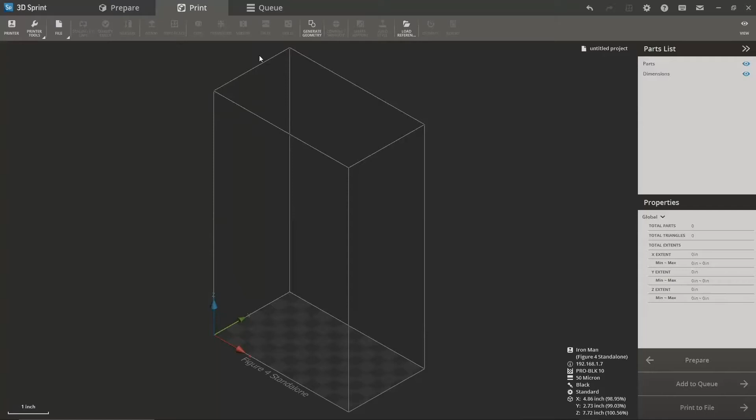All right, so today we're going to just jump into modification of support structures as well as nesting. Kind of give an example of what you can do with the Figure 4 as far as custom supports and things like that goes. The software does a really good job of generating the supports automatically. As you learn the software and you learn the machine, it becomes a little bit easier to kind of dictate where the support and everything should go, where you're pretty sure you're going to need it to have a successful build.

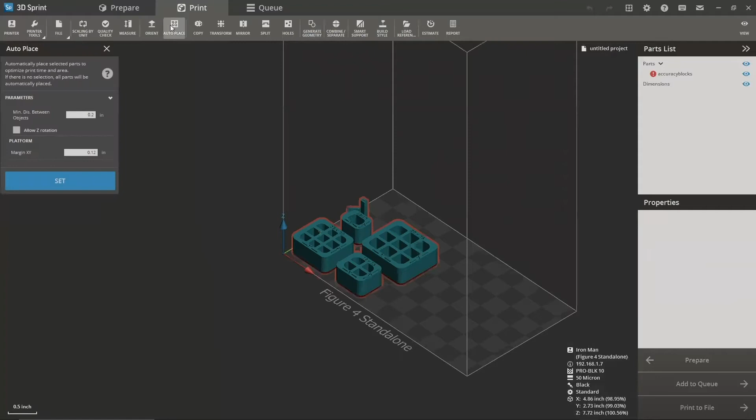So just to get a basic geometry, we can either generate the geometry, or in this case, we'll load our reference parts. Just kind of a preset part to check the calibration of the machine. Really nice and easy. It's outlined in red, so we know it's slightly off the build platform. So we will auto place, allow Z rotation, and that'll just center it in the build platform for us. So we can see here, there's a little bit of a buffer there between the parts and the build plate. That is for our support generation.

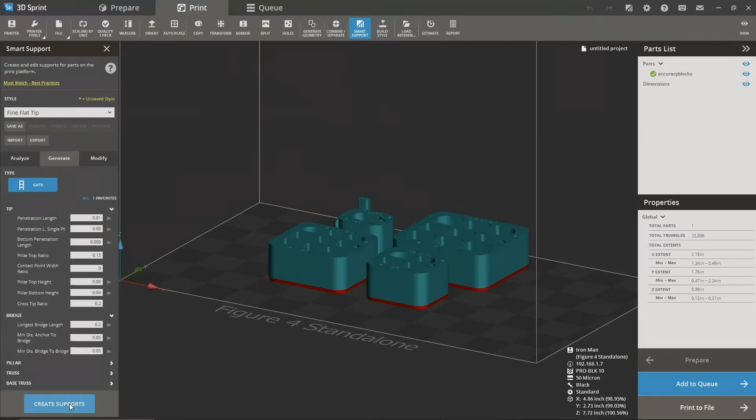There's a number of different presets you can choose from. You can offset the tip penetration length, the single point penetration, really just a wide variety of different parameters that you can offset based on your level of knowledge or comfort with custom support generation. I'm just going to roll with the generic support structures here. Generates that. And you see we have our base, we have pillars, we have our touch points, everything you would need pretty well automatically generated.

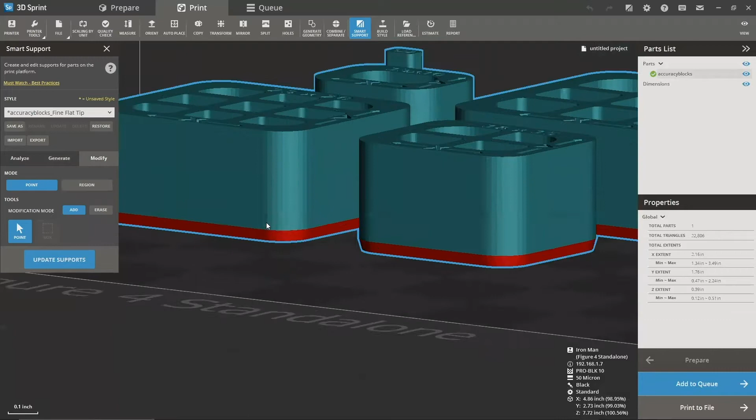From here, we can actually click over to the Modify tab, and basically anything outlined in red here on the parts, that's going to need support. It's a downward facing angle, so that will have support on it. All of our little touch points here, these were all automatically generated across all 4 parts. We could choose to add or delete points just by clicking. Makes it really easy to add.

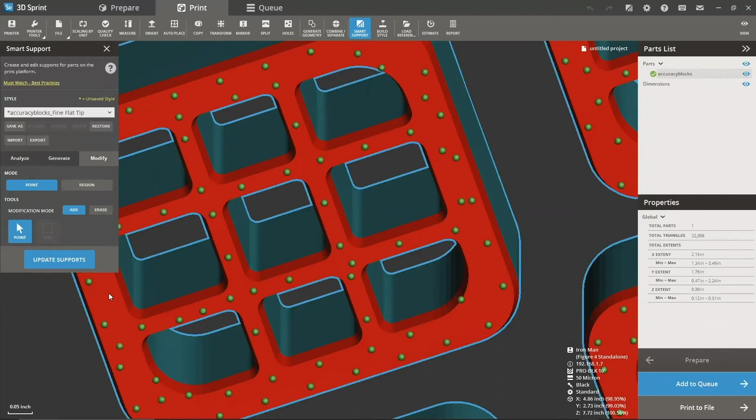If you have a larger part and you fear that one of the corners might peel up, you could add support there, or rounded pieces, you could add support along the edge, make it a true round. Really minimize any issues that you might have. Once you're done, click Update Support. I have done it so many times where I've put about a half hour or an hour's worth of work into something and not hit Update Supports and lost it all. So don't make my mistakes.

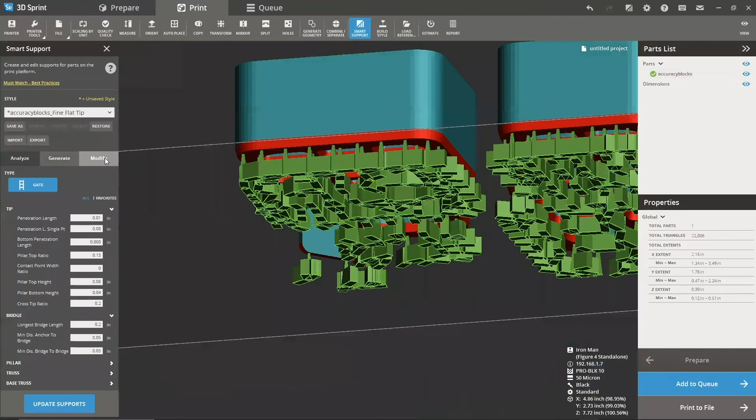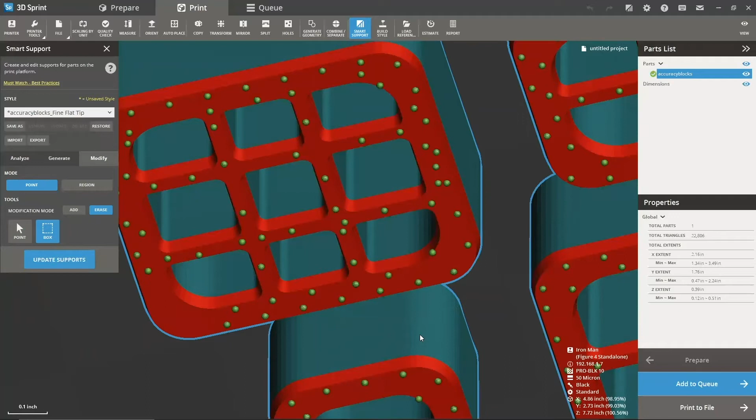Along with adding the supports, I mentioned you can delete supports or erase them. You can choose to go point by point, just kind of delete them out one by one. Or if you want to take a quicker method, there's an outline box that you can use. Just highlight the points that you want to get rid of, and just kind of get rid of everything there.

Again, update supports, and on that piece, it wouldn't have support. Probably wouldn't build, it would just kind of float off into the tray. So in that case, we can highlight it again. And there's our supports again.

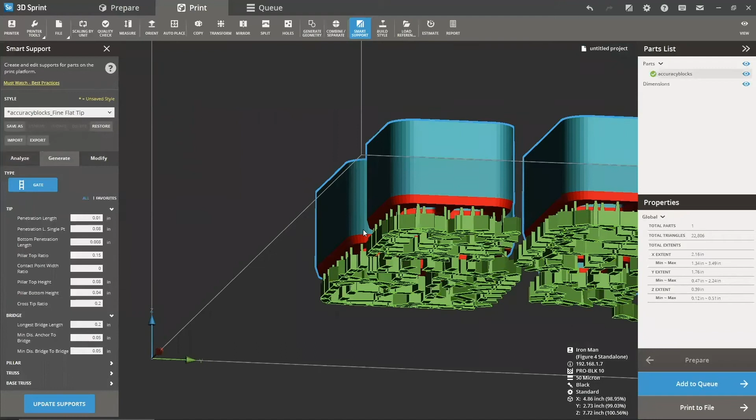So from here, we can take our build estimate based on the parameters we have set for the machine, 50 microns, standard build, about 14 minutes to build these accuracy blocks. You can see here the millimeter measurements on there, 28 by 25 for the big block, 23 by 20 for medium, so on.

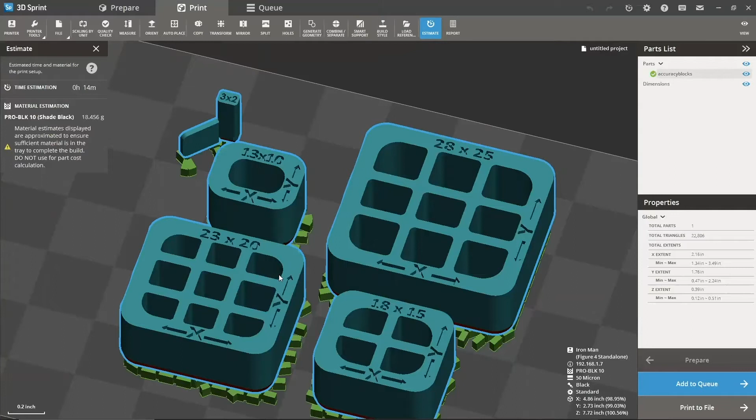So to delete the supports, you just highlight them, you'll see them outlined in blue instead of green. Press delete, and you get rid of the supports again.

So with that, we often get questions - well, can I stack parts in this build envelope? Yes, you can. What it's going to do is branch off support structures from top-facing faces and just add that buffer in between your parts.

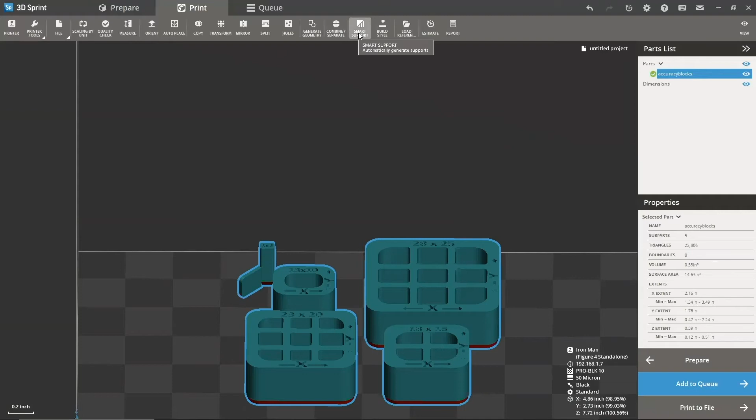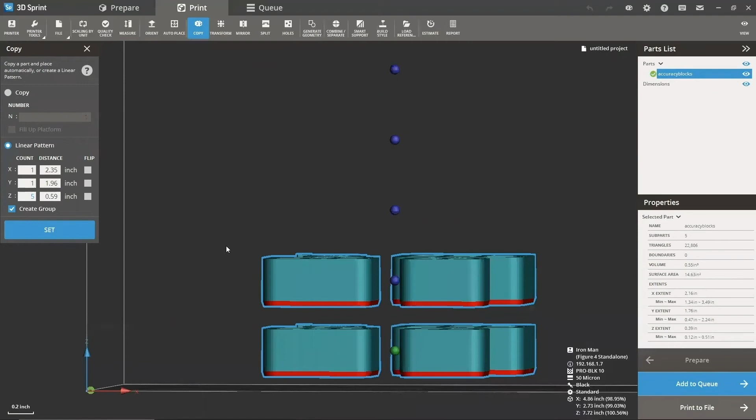So an easy way to nest parts with this machine would be copy, and then under linear pattern, kind of grow it on the Z. It only shows the first one following the line, then dots indicating the rest of the layers from there. So it gives you a good idea of how much space you're going to have in between parts, and you can offset that by changing the distance.

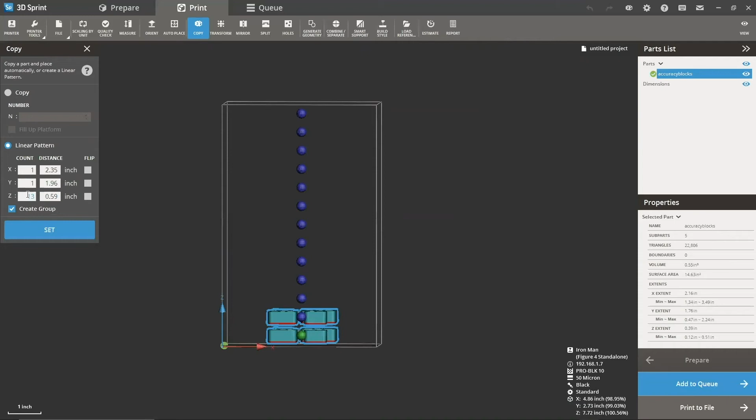For this, I'll just leave it as it is. Try 10 layers - we could probably go even more. 14 is too many, so we'll do 12. So we set that, they all stack. Really nice and simple way to nest.

From here, we'll generate the supports. Yes, a single support can be generated for multiple parts if combined. Do we want to combine the parts? We'll say yes because the parts are stacked in this case.

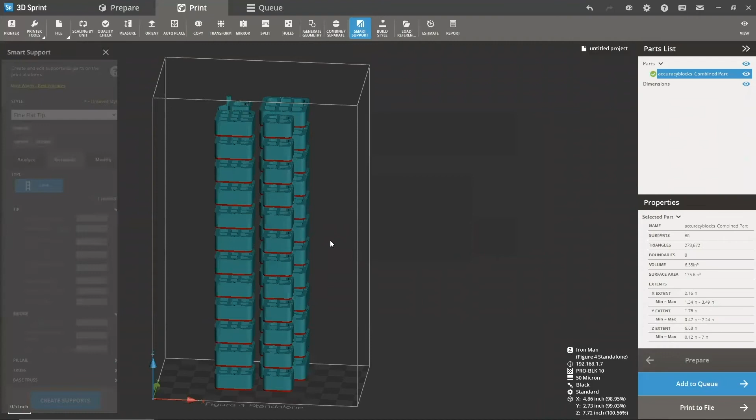Highlight our parts, close these out, and create supports.

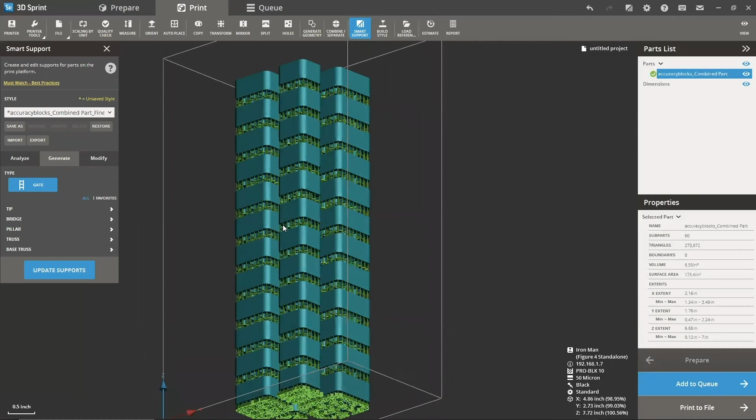So once the supports are generated, you can see here pretty easily, everything's really well automated. You don't have to adjust any of the support structures here. You can by going back into our modify, and you can see all of our little touch points. We hit update supports.

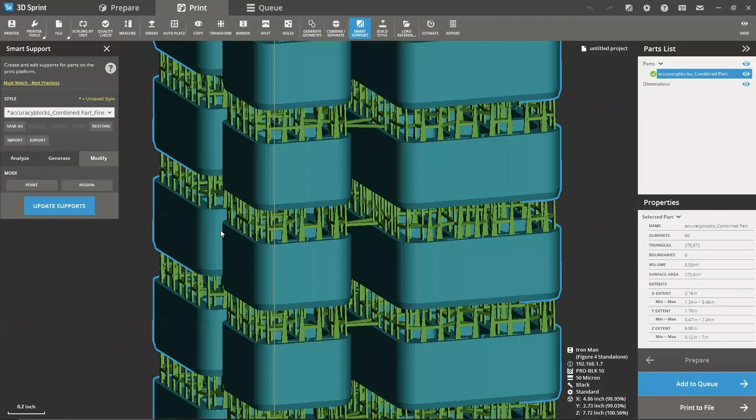And if we hit update supports again, it'll just bring all those back for us. So really a nice hands-off or hands-on experience, depending on what you're looking to do with your parts. So they make this software really simple. If you want to be hands-off, you can.

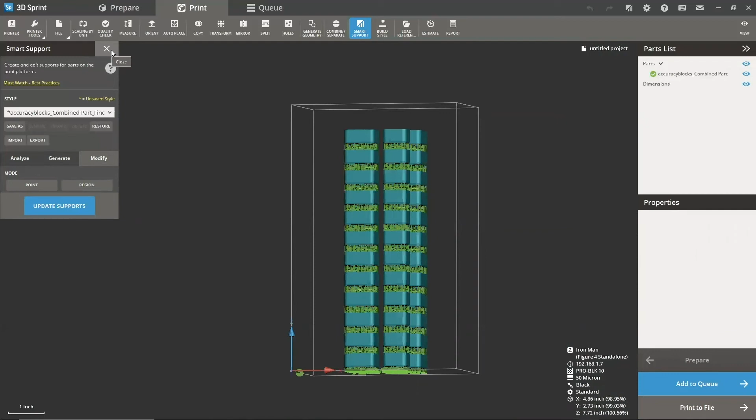Here, instead of just the one layer, now we have multiples. You can do this with different parts - it doesn't need to be just the accuracy blocks, or just one set of parts. You can copy your entire first layer up to the top. The software does a pretty good job of grabbing everything you would need, building everything the way you would need it.

So if we take another estimate, instead of the 14 minutes for the one layer, now we have 13 stacked for 2 hours, 42 minutes. And that's a pretty easy way to nest the parts for a Figure 4.

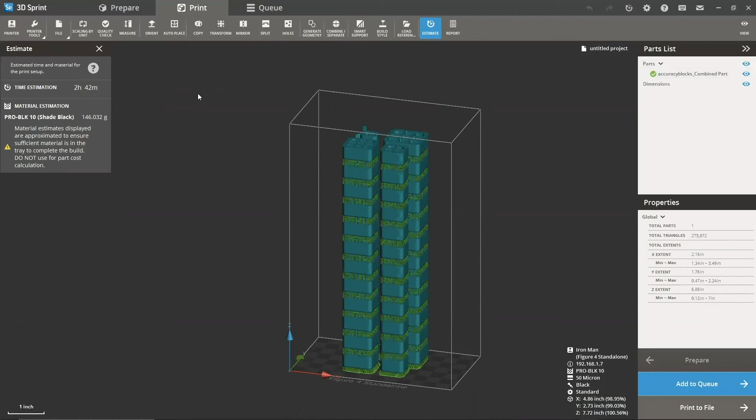So along with nesting on the Figure 4, something else you could really do to maximize your efficiency with the machine is to offset the build parameters. Right now, like I pointed to earlier, I have the 50 micron standard build. We could actually bump this up to 100 microns since we know the vertical surface finish is not an issue for these parts, and we can build it in draft mode.

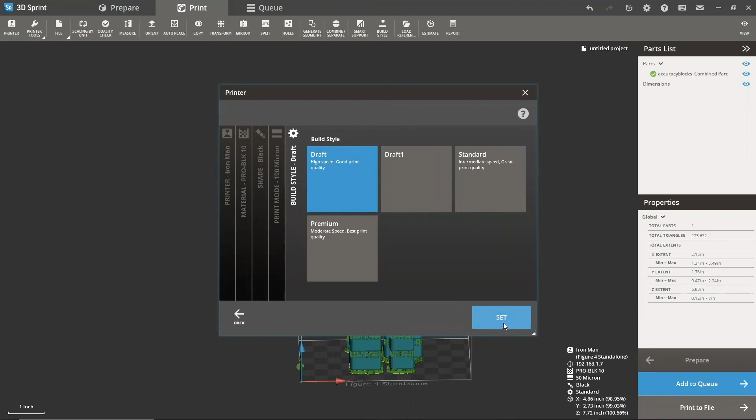So I believe we had 2 hours, 42 minutes. It's going to ask us to regenerate the supports. In this case, we're not going to, because we know everything's going to come out well. So I'll leave everything as is for the support generation, and I'll run our estimate one more time.

And we cut our time in a little less than half - that's pretty darn good. Going from the 2 hours, 42 minutes down to 1 hour, 45. Roughly the same material use, but really saving a lot of time there, effectively doubling our layer height and moving from standard build mode over to draft mode.